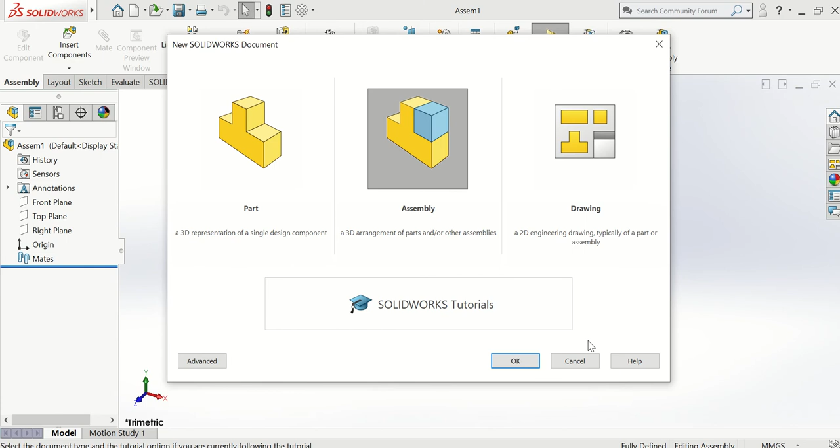Okay guys, so today we're looking at an assembly. If I go up to SolidWorks here in the top left corner and press on File, then New. Instead of picking Part this time, I've picked Assembly. It brings us into this different workspace.

So I'm going to go up here to Insert Components, which is the first thing that pops up when you click into it. Over here I'm going to click on Browse. I'm in my documents here browsing, and I want to go to 5th DCG. It's not there.

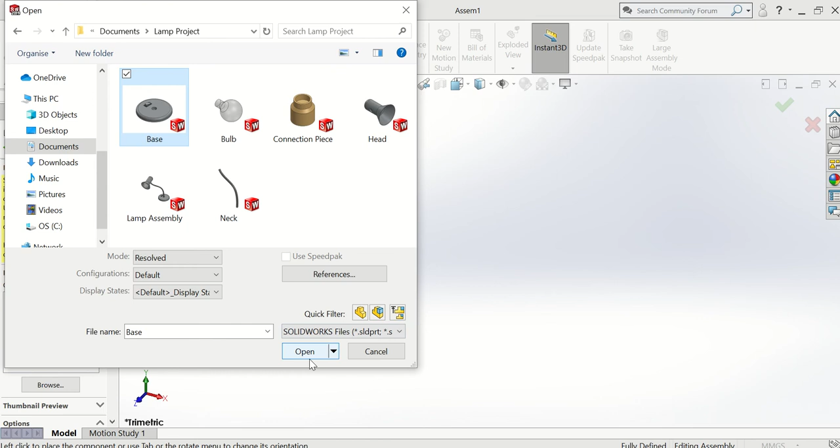My lamp project section here. So I want to open my base, my bulb - just my base for now actually. So I'm opening the base, and I should be able to grab it here and move it around. This is the base of my lamp, and I can place it here wherever I want in my workspace. So I'm just going to place it here.

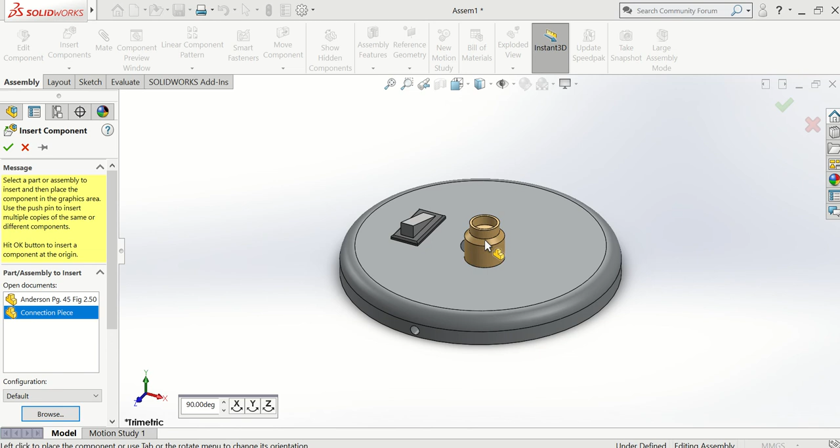Next thing now, I need another component to go into it. So the next piece is the connection piece. I'm going to browse here again, and this time I'm grabbing my connection piece. That connection piece is meant to sit into this hole here. To do that, I'm just going to leave it somewhere close enough to that hole. I'm going to zoom in.

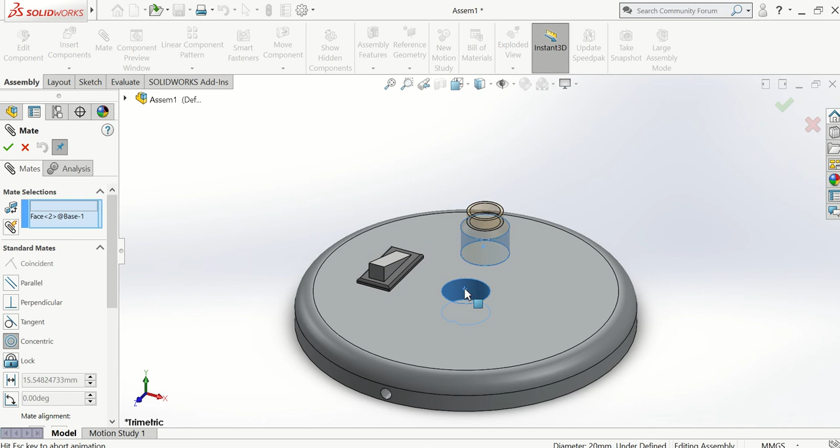So this section here on the outside of the connection piece needs to be in line with the inside of the base. I'm going to go to Mates, click on the outside and click on the inside here. So they're two cylinders, and they're going to be concentric.

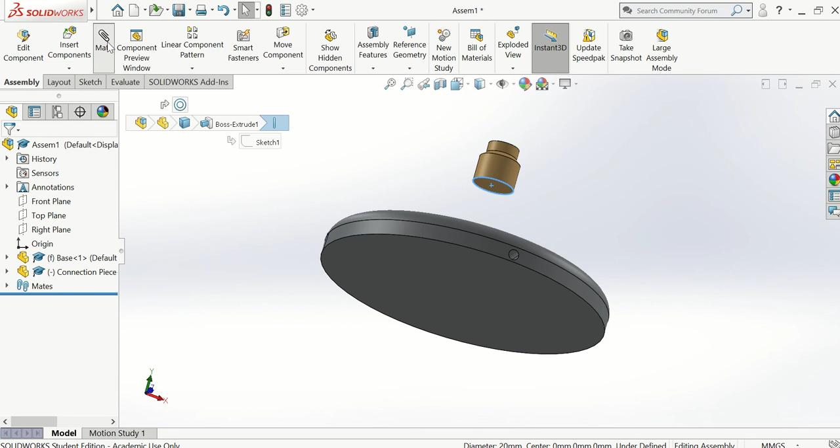If I look down on that shape from the top, they're both right in line there. So I can move that piece up and down like this. The next connection I need to make is with the bottom of this face here. I need to mate that again with this bottom surface here.

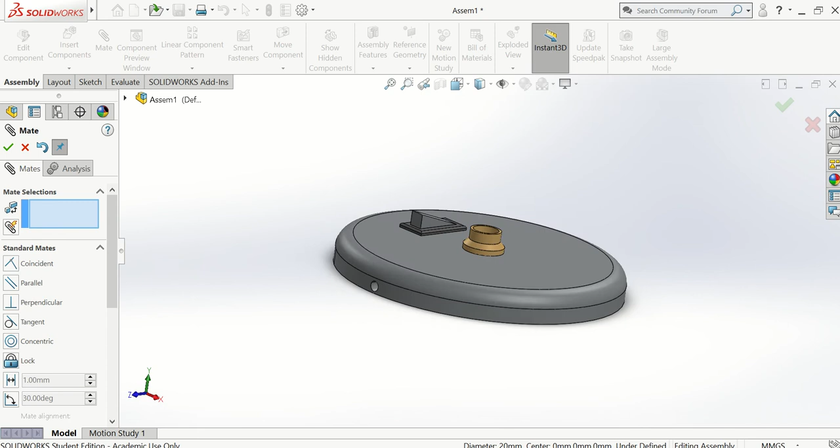So now those two pieces are coming together and they're going to stick together like that. I've made a concentric circle connection here with the outside of this cylinder and the inside of this cylinder cut, and I've made a connection with the base face and the connection piece face. I'll get something like that, and I'll green tick once that mate is done. So those two pieces now are together - they can't be moved away from each other.

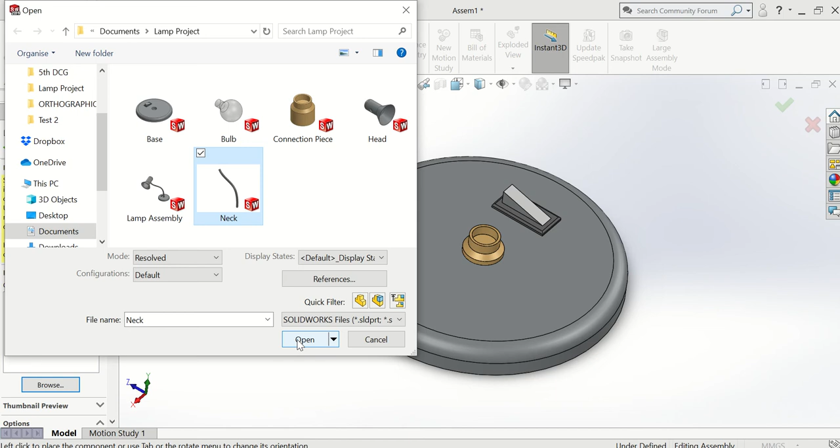Next step is to insert the neck. So going up to Insert Components again, going to Browse, and this time I'm going to put in my neck for the lamp. Okay, so again I can zoom in and zoom out. I'm just going to leave the bottom of that neck close enough to the hole, not on top of it, so I can still work around it. So I've just left it here.

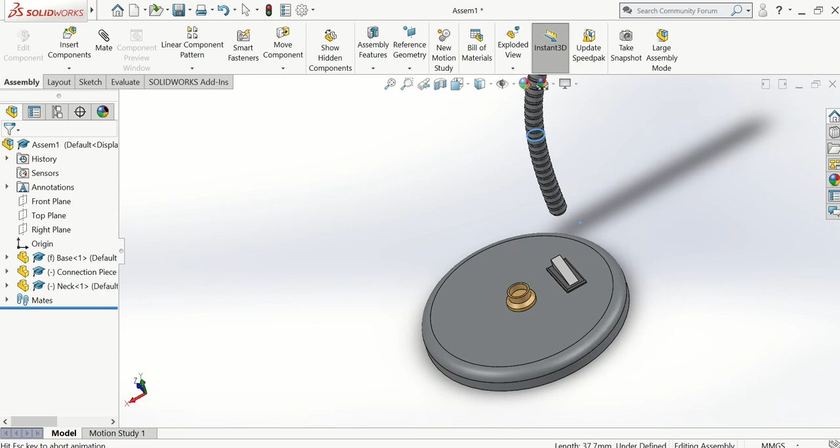Same thing again, I need the outside of one of these cylinders here. So I'm going to raise this up and get the bottom of the larger cylinder. Zoom in. I'm going to select this cylinder here. We have edges here and an actual face of the outside cylinder, and another edge here. So I want to click that face and have it mated with...

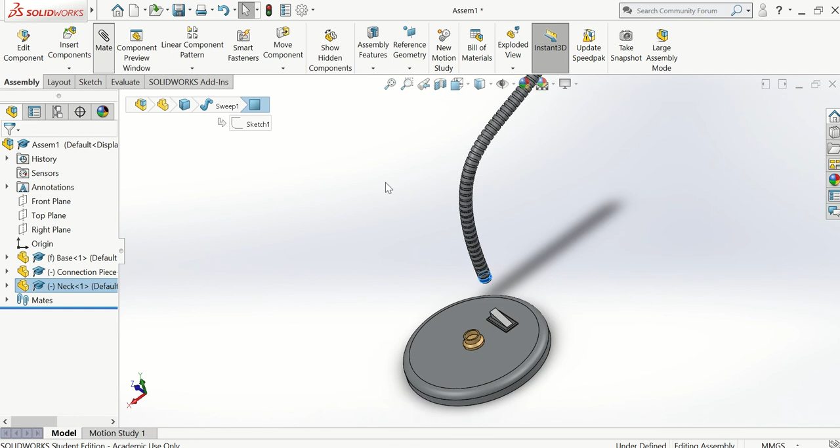Click on Mate, the inside of our connection piece. That should come over just like that. And I want them to ideally be concentric. So let's try that again.

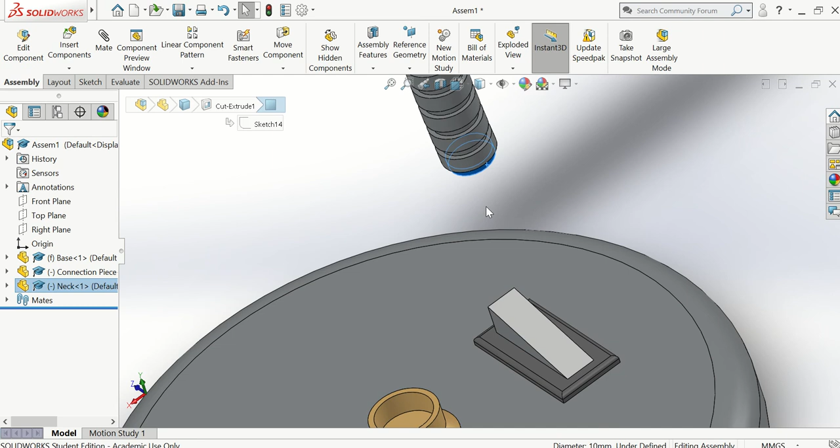Zoom out, zoom in. This time I'm going to try this cylinder face and this cylinder face. I want them to be mates. And yeah, this time now they're concentric. Green tick. I'm going to move them out, and this time I'm going to click on the bottom face.

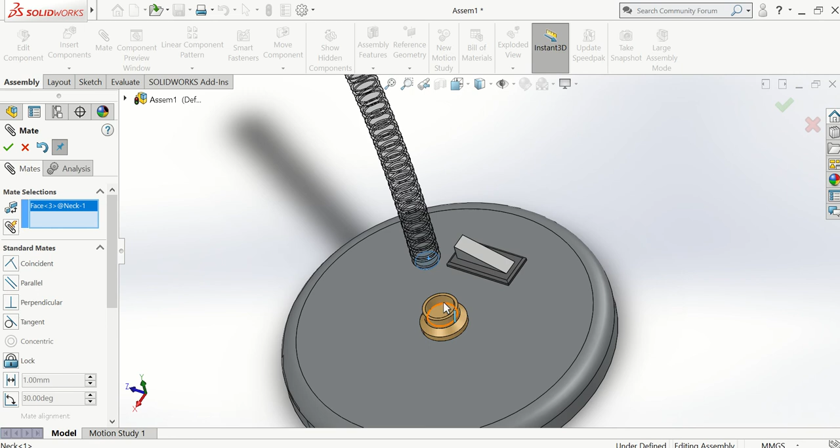So this face here, and this face here, and they're going to be coincident, which means they're touching. So the two faces are touching there, green tick, and that is the neck of my lamp on. So X out of my mates here now, and we can see that the neck will be able to rotate around like this. So that's brilliant.

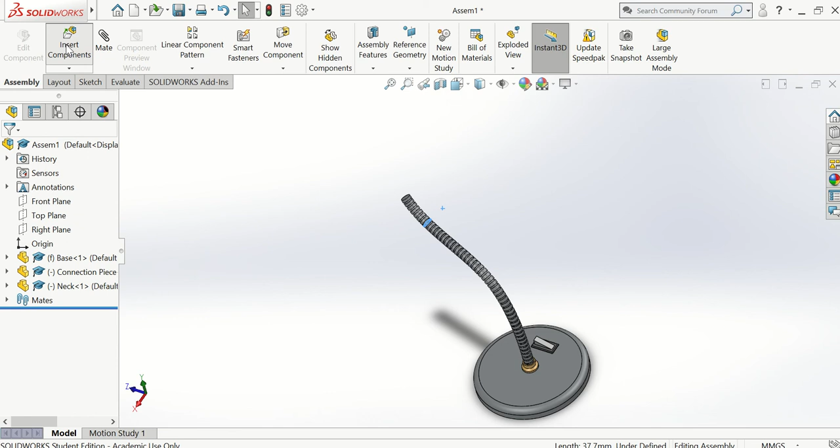Next step now, I need another connection piece on the top of my lamp. So I'm going to insert components and pick my connection piece again - we can use the same piece twice here. I'm just leaving down my connection piece wherever I like. I can also manipulate the direction that piece is in by clicking on these. Okay, so I'm going to actually leave mine here like this.

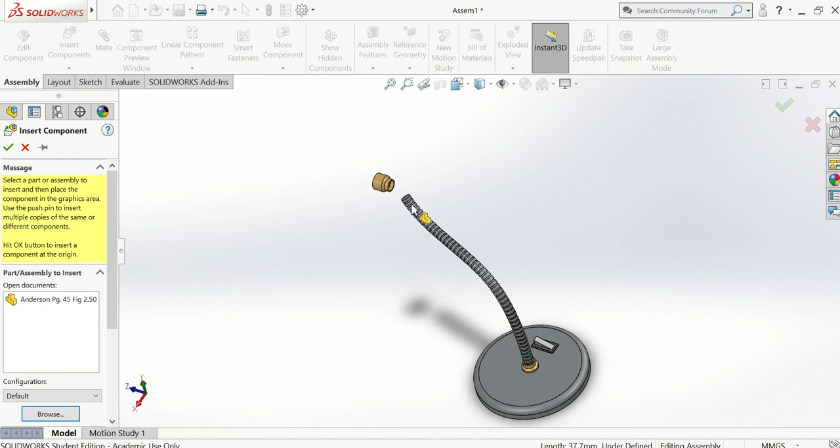Very similar to the last time, I want this piece here to be mated with this inside piece, green tick, and I want this face here to be mated with this face here, green tick. I'm going to go back now to my mates - one of them was wrong, so I'm going to click on my mate here, go down to the one that I think is wrong, and it's this one here, tangent. So I'm going to delete that.

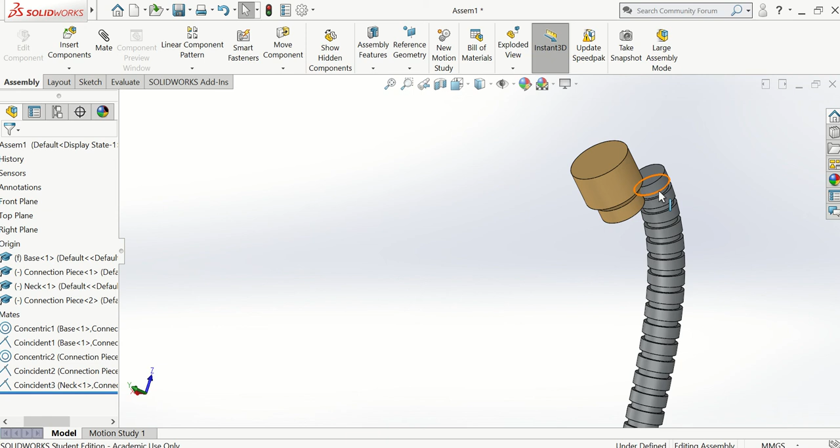This time I'm going to click on this face here and mate that with the inside, and I want them to be concentric. Okay, so I'm going to go back here into my mates and delete this one here as well - it seems to be causing a disruption. So there's no mates now anymore in between the two of these. Back into mates.

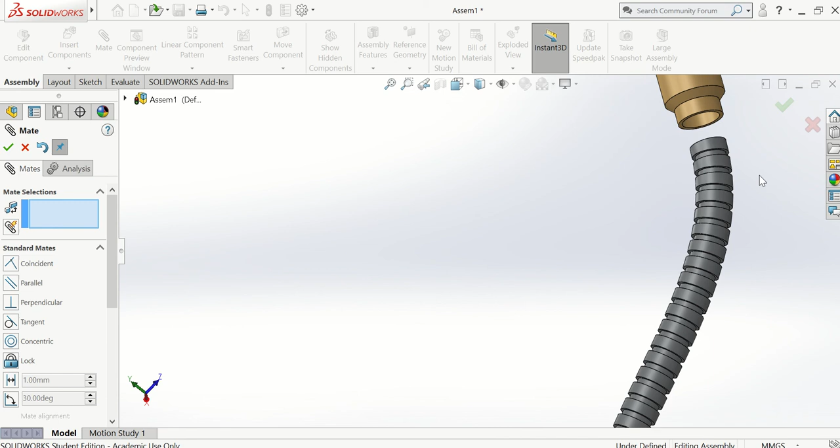Okay, that's more like it. Green tick, once that's done - that's my connection piece put into the top of my lamp.

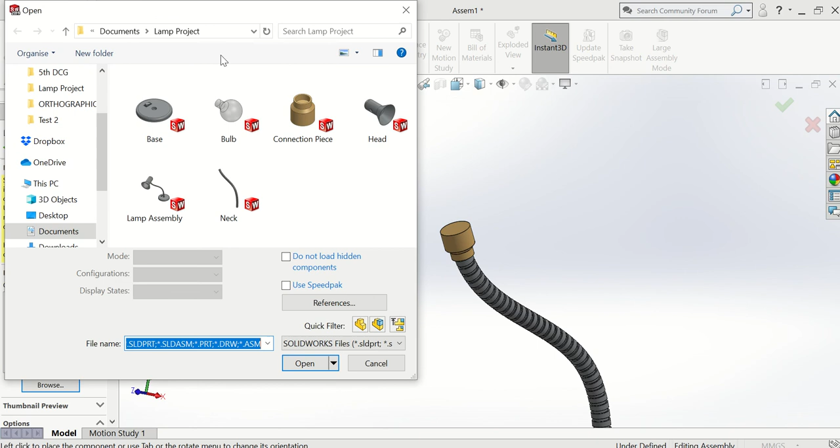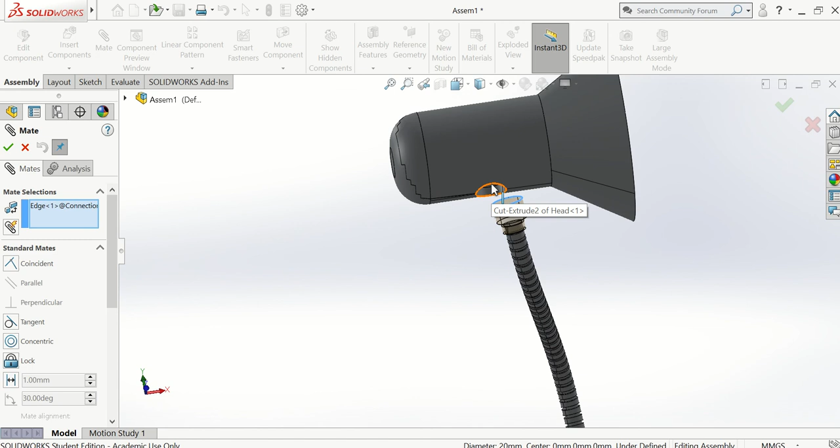The next thing to bring in is the head of the lamp. So X out of my mates again, going to insert components, browse, bulb head, open that, and again I want to manipulate that so we're lining up the hole and top of the connection piece as well as we can. Okay, so I'm picking the outside edge here, mating that with the inside. Green tick, and that should move away now and rotate.

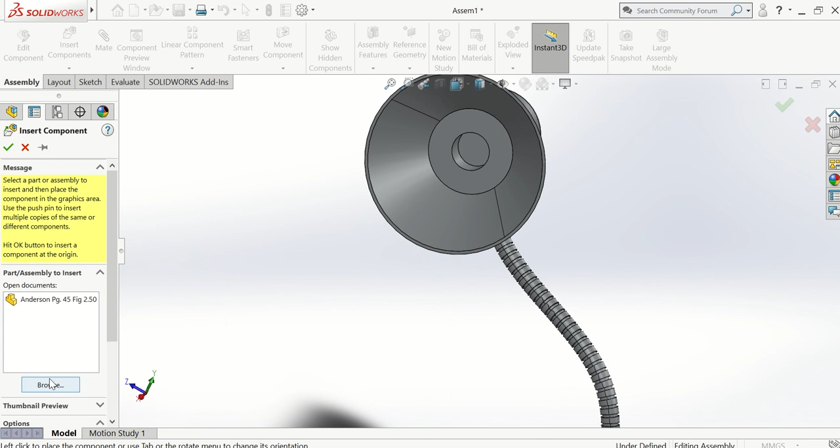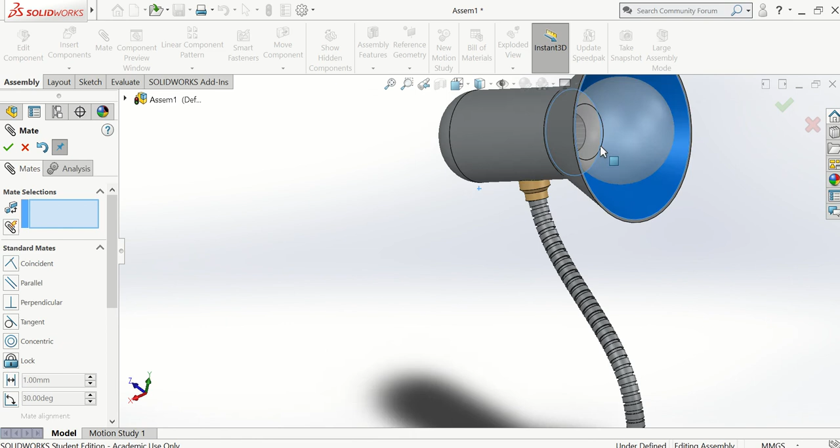Okay, and the last thing to put in there is the bulb. So X out my mates, insert components, browse, and this time I'm looking for the bulb. Open that up so that fits in there fairly nicely, so I'm going to leave it down like that. Inside edge is going to be mated with the inside edge. Green tick once that's done, and that bulb will move now with the head and rotate around the lamp.

Okay, so that is our lamp now put together. Green tick once we're finished mating, and I'm going to File and save that now as an assembly. So I can save that as lamp assembly.